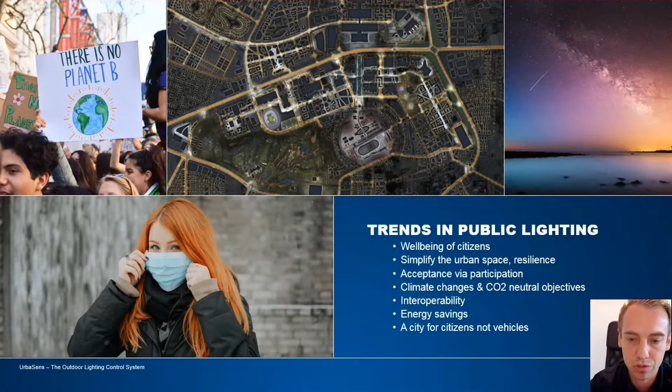So this is our portfolio. We have two levels. The first level is a local control system. That means we have a small group of luminaires, talking about 20, 30, 40, 50 luminaires connected over a mesh network, and there is no additional communication connection towards any clouds. So we have a local control solution you can commission on site, do your maintenance on site as well, and leave the site without any remote accessibility. This solution will be available in Q1 2022.

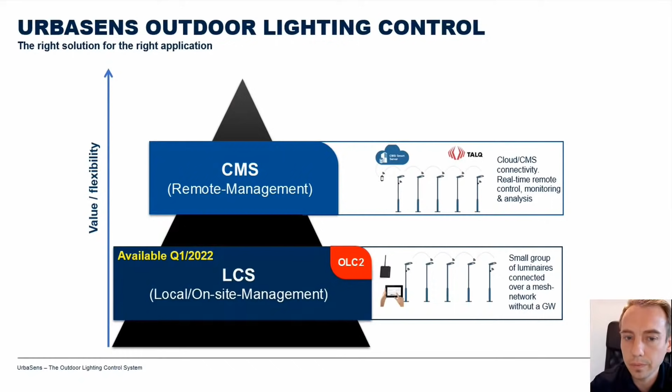Today we will dive into our CMS solution, so central management solution, where we have TALQ 2 compliant cloud accessibility, and the CMS is connected over the gateway, and through the gateway we connect all the luminaires in the field towards the cloud and then have accessibility over the dashboard to visualize and adapt all the parameters on site. Furthermore, you can analyze historical data, be ready for maintenance and better understand the health of a luminaire. The local control solution is our outdoor lighting control 2, and CMS is our OLC3.

Coming now to outdoor lighting control level 3, here we will make a comparison between two different technologies we have within our portfolio. The first one, very well known in the market, is the mesh technology. So we have here different nodes connected on the top of the luminaire, or in our case, we have pole-mounted controllers as well. These controllers communicate with each other and establish a stable network.

All the data will then be shared over the mesh network and will reach, at a certain point, the mesh gateway. And through the gateway, all the data will be sent towards the cloud or smart server platform. And through the dashboard, you're then able to register yourself, adjust parameters on site and do your commissioning remotely.

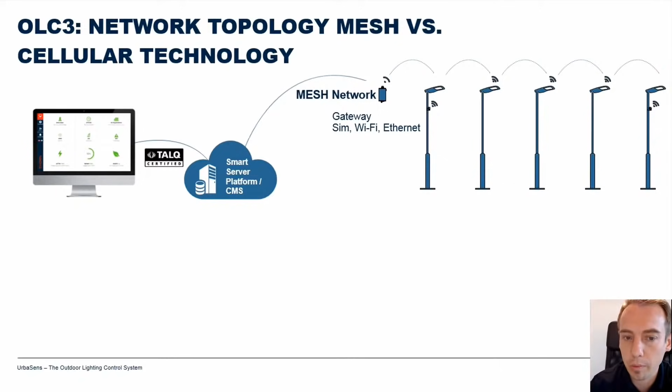So this mesh network is a solution we have within our portfolio, and we have just launched a new solution, which is a technology based on cellular. So we're talking about the public local network. That means here the communication is through the cellular technology. So every single node is communicating over the base station towards the smart server platform.

That means this is a star communication, and you can install even a single luminaire with a node. There is no need of any gateway because the communication is going directly through the base station, and this topology will simplify many installations and make small installations easier in terms of commissioning.

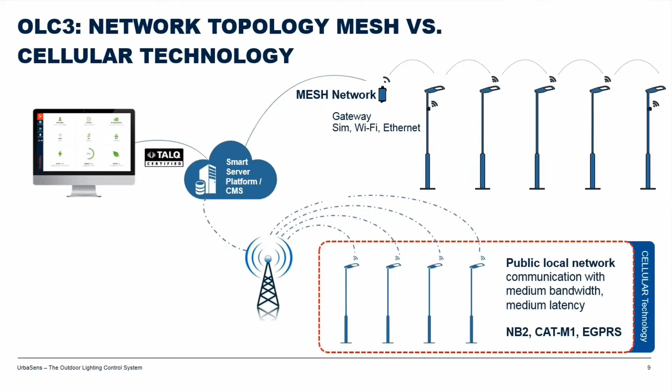So our connectivity portfolio looks like that. We have, first of all, our Zhaga components you see here. So all devices designed based on the Zhaga Book 18 interface. As we talked already about, the Zhaga mesh technology, that's the first device. The device in the center is the new one, that's a cellular based technology device.

Furthermore, we have our PIR sensor within our portfolio, and this is our Zhaga portfolio we will further extend later on. But for outdoor luminaire designs which are decorative or are not able to take a Zhaga interface on the top or bottom side of the luminaire, we also have a portfolio where you can install and connect at the pole a motion sensor.

You see the first one, it's a wireless controller plus a motion sensor integrated. We have as well a wireless controller, so you connect it at the pole when the luminaire has no place for a Zhaga interface. And the gateway is the solution to connect the mesh technology together, so the different nodes.

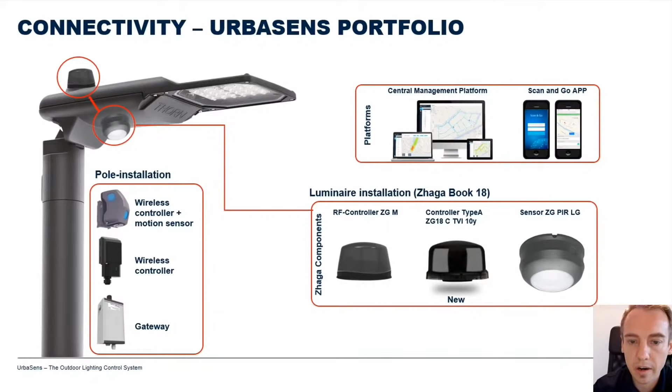Everything is then connected towards the CMS, and there we have our platform, the central management platform, the dashboard, where we are able to see the status of the luminaire. We can have as well a heat map of the places where we have a high occupancy. And with the Scan and Go app, commissioning is easier done on site. So this is our portfolio we are providing under the brand UrbaSens.

Coming now to the dashboard, to our software, which is web-based, so you don't have to install it. So it's a web-based technology. And as we talked about already in the fourth session about D4i, you see here a few data which are already available on the dashboard. For example, the mains voltage is reported through the driver, and over our wireless controller, we have all the data then available on the CMS.

Then we have mains current, active and apparent power. That's two specific data points requested by utility companies. Energy consumed, so we have clear information about the consumed power for a specific luminaire or even a group of luminaires we can summarize later on.

Lamp and driver operating time, so understanding better the lifetime of the devices, plus power factor, which gives you an indication, for example, of how stable the network is. Especially when you start dimming down very low, power factor is decreasing, and with the decreasing power factor, the energy efficiency is reduced. So with power factor, we are able to verify the efficiency.

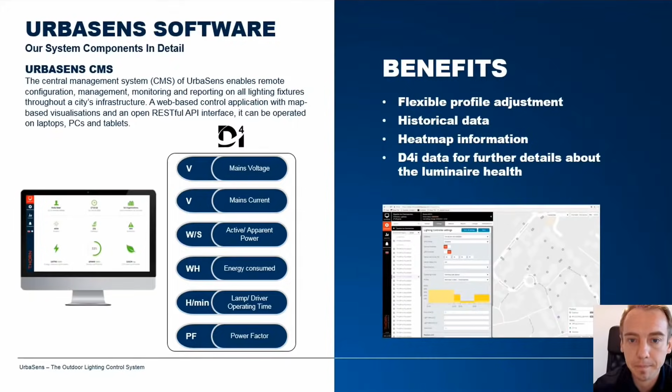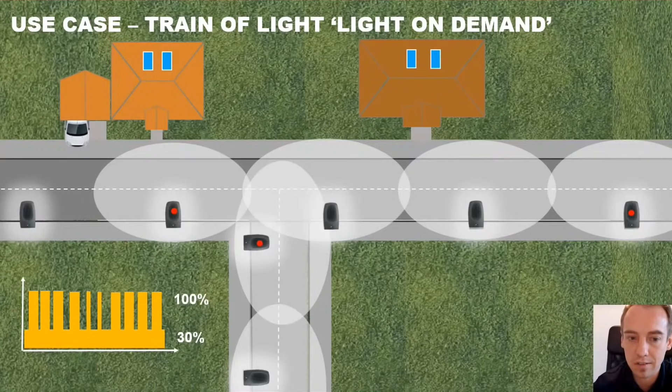In that case, you see on the left side how often an object was triggered and how often the light was changed to 100%. So with this, we have our light on demand feature, and really have light when it's needed and where it's needed.

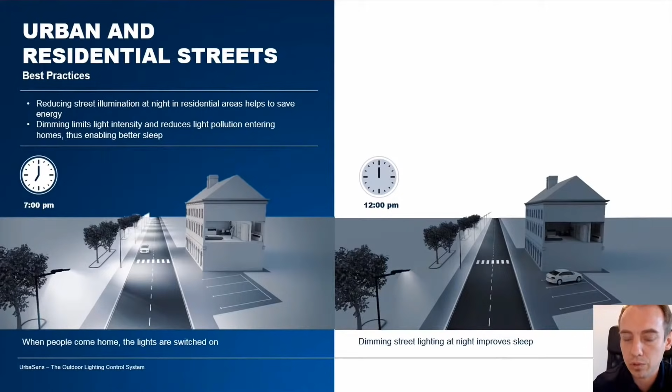With this, we're concluding that during the rush times, especially during winter time, we have, for example, at 7 p.m. still traffic, and the light is up to 100% illuminating the roads. So here we have safe lighting, and once it's coming to midnight, we are dimming down, for example, to 30, 50 or 70%. So we are flexible in adjusting these parameters through the UrbaSens solution. And that means we have reduced the light a lot and can save energy, plus the light pollution is decreased by a specific percentage.

How do we do that? That's done typically over a motion sensor. Here I'm highlighting our pole-mounted motion sensor, which has four PIR elements to detect up to 4 different areas. So you see here the longer distance on the right and the left sides. With this, we have around 17 meters left and right detection area to detect, for example, cars or any bigger objects passing by. In the center, we have mainly the detection for objects which are passing by, for example, in the back, pedestrians. And with this, we ensure that most of the area is detected and take care of the use case light on demand.

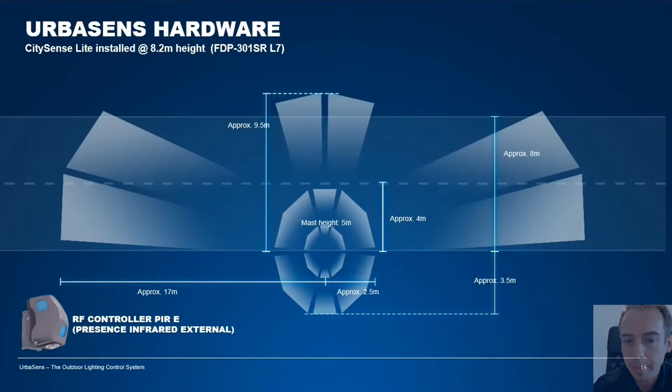With the ZG sensor, we are able to detect the round highlighted area now. So this is a round shape lens, where the objects we mainly detect are persons, and the speed is limited to up to 25 kilometers per hour. That's the limitation of the sensor. And with this, we are able to detect a round-shaped area, mainly in residential lighting and parking areas, and with the pole-mounted sensor, we are able to detect roads and streets where we have faster speed.

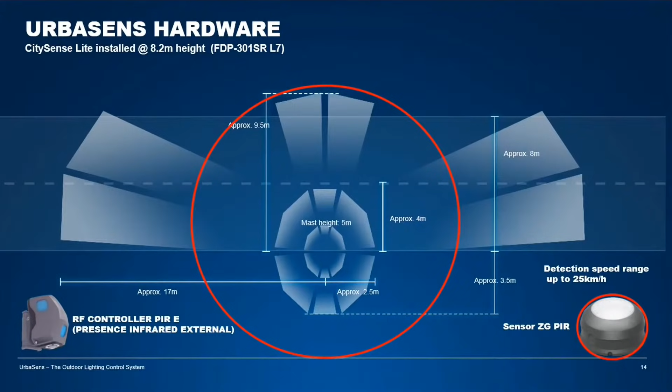This is another use case which we will enable through the OLC2. That's our lighting innovation called variable light distribution, and connecting later our wireless control solution, we are able to adjust the CCT or adjust the light distribution on site, and that is only possible through the OLC2 and is coming next year. With this, we extend our trends as communicated in the beginning and take care of well-being and better visibility on site through this variable light distribution.

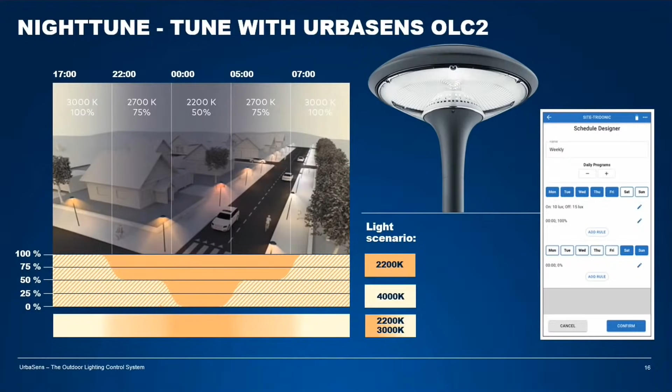Furthermore, with our NightTune, we are able to adjust the parameters, so adjust the right light schedule and define the timing and the day. You even see on the screenshot the day when we want to change the CCT, and all the timing is done through the OLC2 to extend our portfolio in terms of use cases and be able to cover specific trends within the smart city environment.

Closing this, UrbaSens is a lighting journey for an interactive and fully networked city. And the installation will bring us towards a vision of smarter and efficient cities, as we described for what UrbaSens stands for.